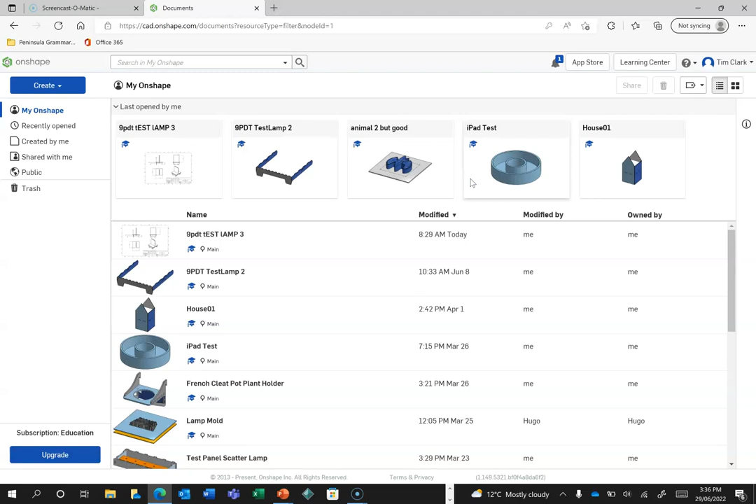The document title is going to be called, I'll call it Tute, because I'm using it for tutorial, Etch lamp, Etch LED lamp. That way it's named nicely so I understand exactly what it is. I'm going to press OK, and it's going to bring me straight into our working space or document.

So we're now working in our document. Before I do anything else, I'm going to try and remember where everything is, since it's been a while since I've used this. I'm going to create a variable down here, and it's going to be called material thickness. I'm going to set it by default to be 3mm, and I'm going to press tick.

The reason why I set my material thickness to be 3mm is that way I can define it, and if I want to use something that's 2.9mm or 2.8mm, I can change it to that size without having to redesign my entire lamp around that. You can only do a certain amount of changes before your design breaks, so this is only for limited changes, but we're going to set that up as material thickness.

Beyond that, I don't need to change anything else, and that is step 1 done. That will auto-save no matter what you do, so you can continue working. If your internet goes down, it'll save the last thing you did, and so on and so forth.

We're now up to step 2. We're going to start creating parts. The first part we're going to create is the main base. The main base is the jointed part which joins the entire thing together and holds the batteries and that sort of thing. So we're ready to go in OnShape, and we're going to create the main base.

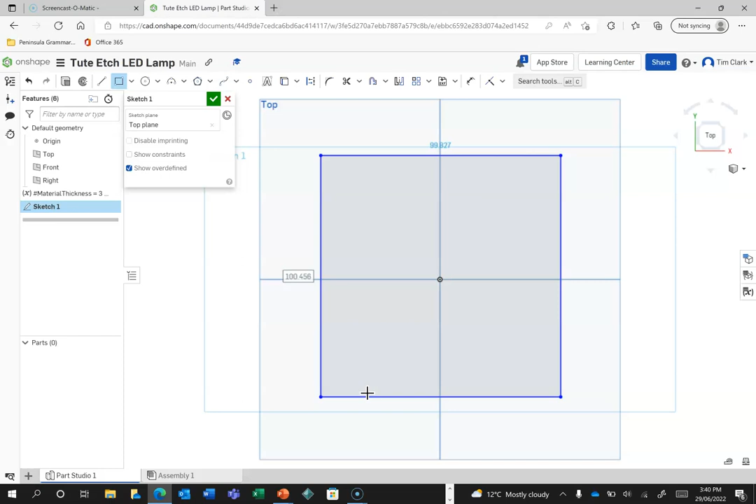It's important that we have our square perfectly on the middle, because that will mean we can do duplications or mirroring. Particularly, we can use the mirror feature a lot more effectively, which becomes really, really important to do.

So I'm going to set it up in the middle by doing this. I'm going to draw a line, so click on the line, and select the construction tool and click on that. I'm now moving my mouse around until it pops over, and you can see the little grey icon changed to a line with a dot in the middle. That's a midpoint connection, so I'm going to click on that. I'm not dragging, I'm letting go, moving my mouse freely, and finding the other midpoint over here so that little line with a dot appears again, and I click to accept that.

I'm now going to use the constraints tool, so I've still got this going. I can press escape, but I'm not going to. I'm just going to use the constraints tool, find the midpoint, and lock the midpoint, which is this middle thing here, to the middle of this line. So now that midpoint is locked.

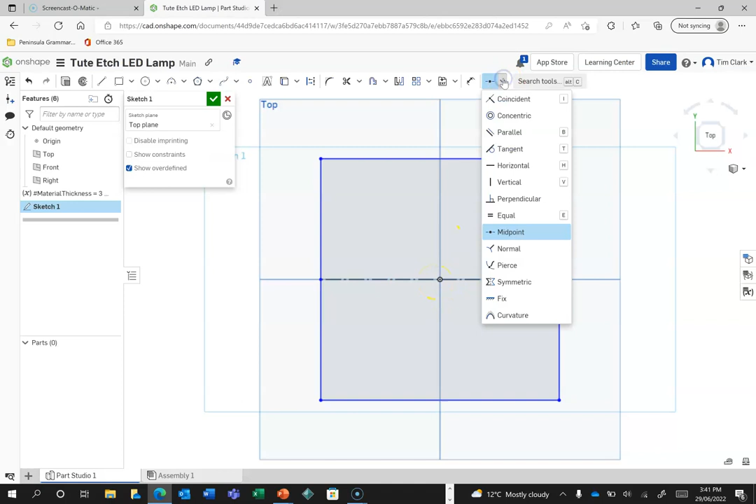I'm also going to make it a square, so I'm going to use the equals tool on this line here and this line here. If you make two sides of the rectangle the same, it becomes a square, because two adjacent sides become equal.

Now I'm going to finally set the dimension, so that's the dimension tool there. Click on there, move it up, click once, click here again. Notice I'm not clicking and dragging. 120 millimeters is the size of our base. I'm going to press enter, and my internet's being a bit slow, and there it goes. So we've got that square ready to go.

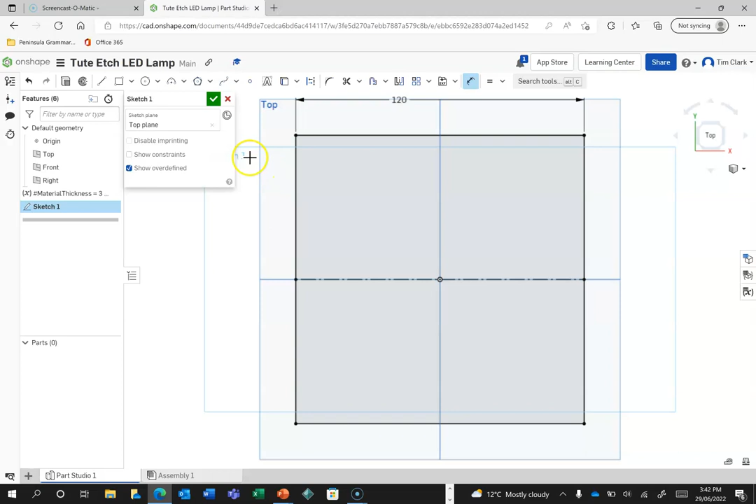That is perfect, that's what I want. I'm going to press the tick to accept that sketch.

I'm then going to press on this one here so that I can see, maybe that one there, so I get it around the right way, so I can see my square in a sort of 3D perspective.

The final thing I'm going to do to make this part is extrude it up, and the extrude depth is going to be equal to M, the material thickness. I'm going to click on material thickness, and press tick, and that is my main base. So I'm going to press tick to accept that extrude.

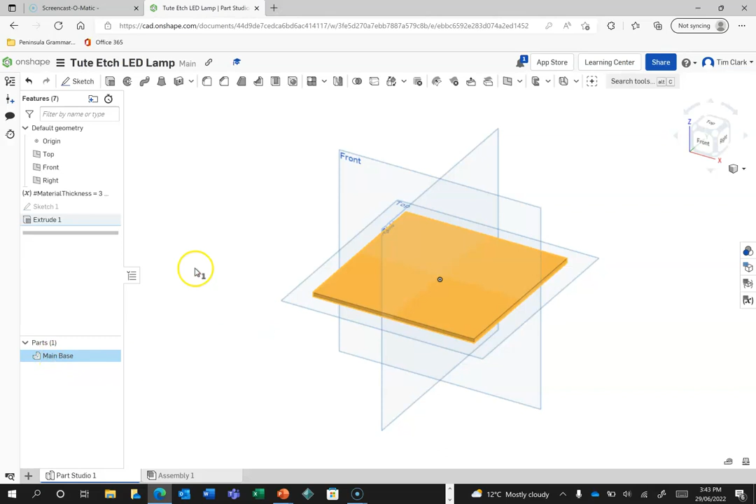Now that I've got this part down here, I'm going to right click on it and choose rename, which is right up the top, and I'm going to call it main base, and press enter to accept that change. So now that's called main base. That helps me to understand that, so I'm definitely going to label my parts here, and that is step 2 complete.

We're going to create now step 3, the legs. The legs will stick out of the main base and will be finger jointed at one stage, but we need to just create them in the first instance. Creating the legs is a fairly simple affair.

However, we're going to make sure that we are looking at it this way. If you've created yours on the front instead of the top, or on the right instead of the front, or on the top instead of the front, you need to go back and do step 1 over again.

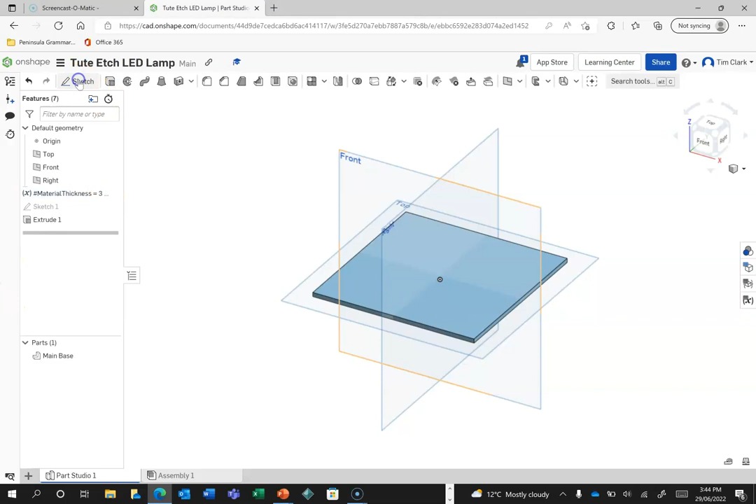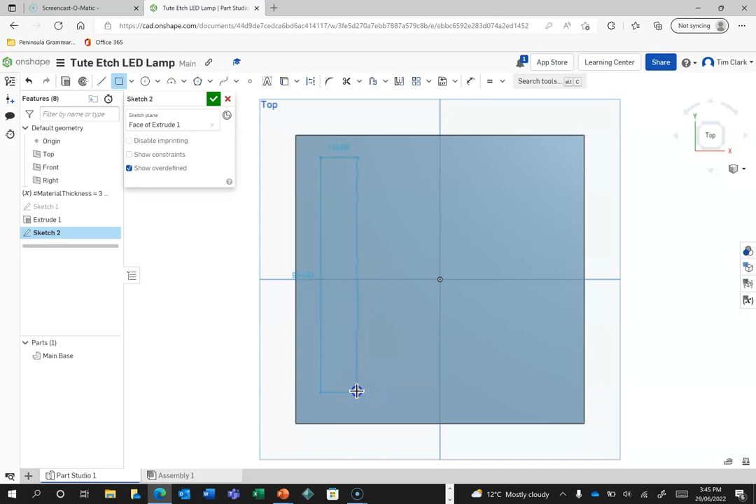So we're going to create the legs. The legs are fairly simple, they're going to be rectangles. I'm going to draw a sketch on this one. Instead of drawing it on any plane though, I'm going to make sure the outside of my square of my main base is selected, and click to accept that. I'm then going to look at that from the top, and draw in a rectangle. The rectangle is going to go from this top quadrant here, and it's just going to be roughly that size, like so. So you can see that I've drawn the rectangle.

We're now going to fix this rectangle with some dimensioning tools. I'm going to click on the dimensioning tool, and click on this line to select it. It should select it, maybe I've done that wrong, so I'm going to press escape. If I ever get in trouble, press escape and click on the dimension line, then click on the top line of the rectangle, and that's going to be the dimension. I might put it over here, and make that 10 millimeters.

I'm now going to set this dimension from here, from this bottom line. Click, let go, click, let go, click over here, let go, 10 millimeters.

And I'm going to set this one in here, click between here and here, click and click. This will also be 10 millimeters. Now, the width of my rectangle between this line and this line is going to be my material thickness. So once I've got the material thickness done, press enter.

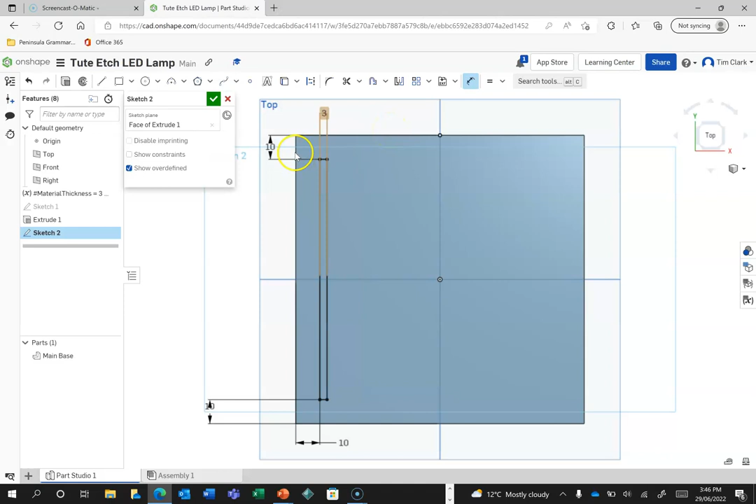There it is, it's now set to 3. If I go back and change the material thickness now, it will change the thickness of my main part and will change the size of that rectangle. I've now completed that sketch, it's now black.

I'm not going to draw my other leg in, I've got a different way of doing that. So I'm going to press tick in order to do that, and I'm going to look at that from the angle, and zoom in on that section there, because I'm going to do an extrude, and extrude that part there in a different direction.

So I'm going to change the direction, and it is going to be 40 plus material thickness. Does it accept that? No. Well, we'll make it 43, and that'll be fine because it doesn't really matter whether that works. I'm working on it in a different program.

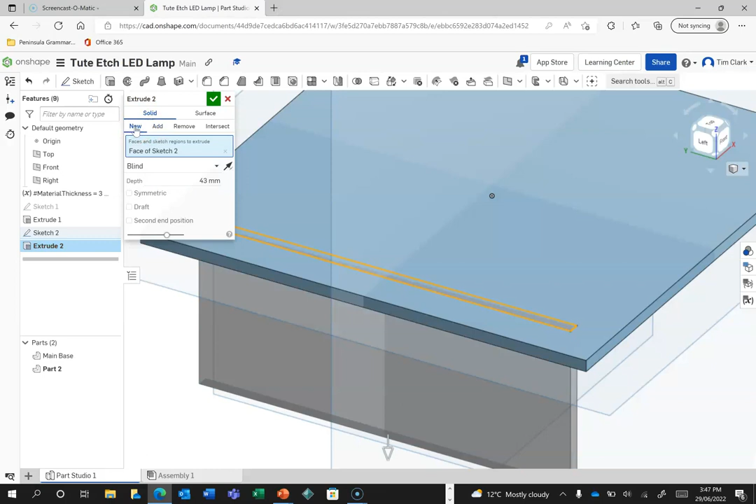Now you'll notice that it says add here. I don't want it to say add, I want it to say new, and press OK or tick. Now if yours is not a different color, and you can't see this line here, it means you added it. So we can go back into Extrude 2, which is where you created that, and change it from add to new. That is going to be my leg.

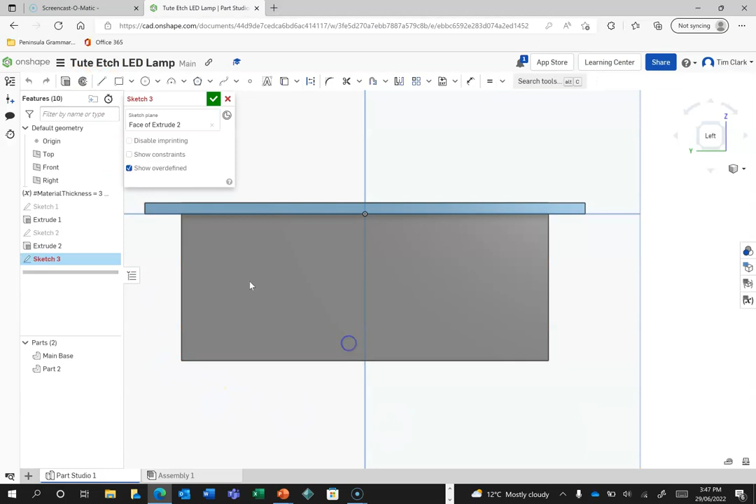You can see there that's a bit of a boring leg, so I might actually create a bit of a sketch on here, and put in a rectangle from here to here, and make that some dimensions. Click on here, let go, click on here, I might make that 10 up, and press escape, and drag that line in there so it's inside.

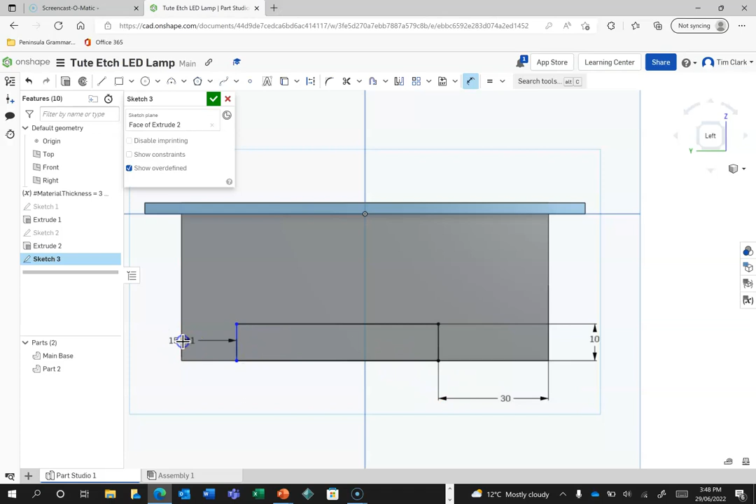Now I'm going to press on dimension again. Difference between here, click, and there, click, I'll make that 30 millimeters, and I'm going to make this one here to here 15 millimeters, and press tick, and go extrude on that rectangle there, and this time I'm going to choose remove, and we can see there that it's not removing it, it is removing it. So I'm going to press tick.

That's my basic leg. The final thing I'm going to do before I do anything else is I'm going to cut the fingers out of this one. Actually no, I'm not. Fingers are later. So we've got that part there.

The final thing I'm going to do is use the mirror tool. So I'm going to create a mirror, this little one here. It's a mirror, a grey part and a white part. I'm going to click on the mirror tool, and click on the part that I'm going to mirror. See, it says it's blue here. That's what I'm doing at the moment.

Entities to mirror - so I'm selecting the part I'm going to mirror. I'm going to select that one. Now I'm going to click on this one. So this is blue. The mirror plane is going to be the right plane. And it's going to put another one over there. You're noticing it's adding - if I do that, it's going to basically join them all together.

I need to click new. So if I didn't do that, then we're good. And we're going to press tick. So we now have two legs.

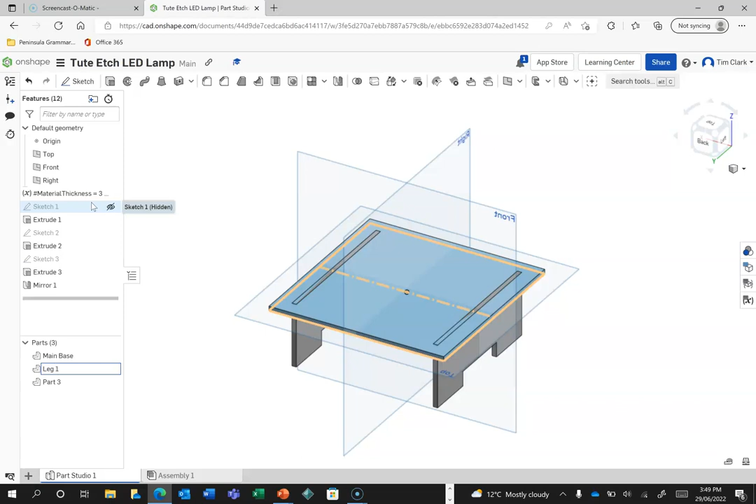I'm going to rename them. Rename leg, LEG 1. Press enter. And I'm going to rename this part here as LEG 2. Press enter. So we've now got our legs for our lamp, and we are now finished that part.

Now we're going to create the cross panels. The cross panels are going to strengthen the legs so they don't wobble from side to side or easily break, and that will also hold the LED panel. The cross panels are going to add strength between the two legs.

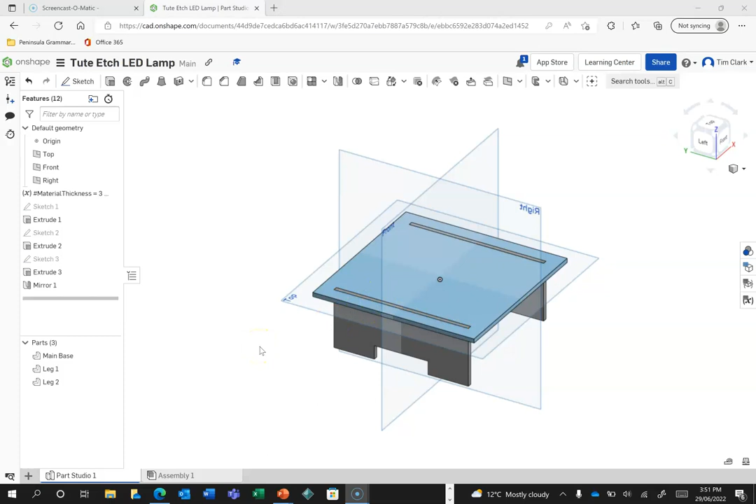If you actually just join this right now as it is, it would work because that part's interlocked with that part. But if you try to join them right now, they sort of wobble a bit. We don't want that, so we're going to add in a cross panel on each side in order to make that work. We're going to do this first of all.

Now we're going to hover over the main base and press on that little eye to make the main base disappear. We don't need to see the main base in order to do this.

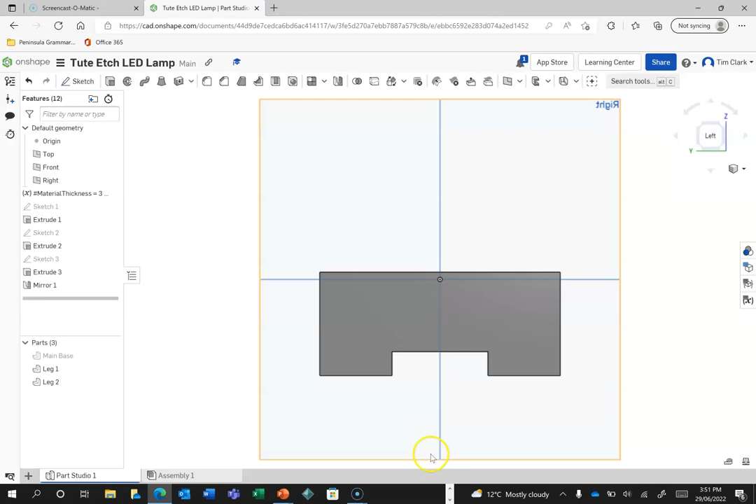I'm going to look at this from the left hand view, and basically put a cross panel over here. The strongest way to do this is I'm going to press sketch, click on that panel, and put the rectangle just inside this part of the shape.

Not on the edge of the shape. If you put it on the edge of the shape, it's strong, but it's not quite as strong as putting it inside the shape. So I'm going to make sure I'm hovering over that line for my first click. I'm letting go, not clicking and dragging, and I'm going to pull it down about that far, like so. And there we have the lines that we're going to draw for our cross panel.

We need to dimension them, so I'm going to use the dimension tool. I'll click on here and click on here, and use material thickness, 3 millimeters. I'm going to set the dimension from here to here. The thickness of the actual panel is also going to be material thickness of 3 millimeters.

The distance from there to there, I'm just going to click once, pull out, and drag down. I'm going to set that to be 23 millimeters. The reason why I'm going 23 millimeters is the top 3 millimeters from there to there is actually into the base. So we're going to press 23.

Now, obviously, if we need some adjusting, that's not going to change too much. It's still going to be roughly 20 mils down, but that's what we'll actually have it set up as.

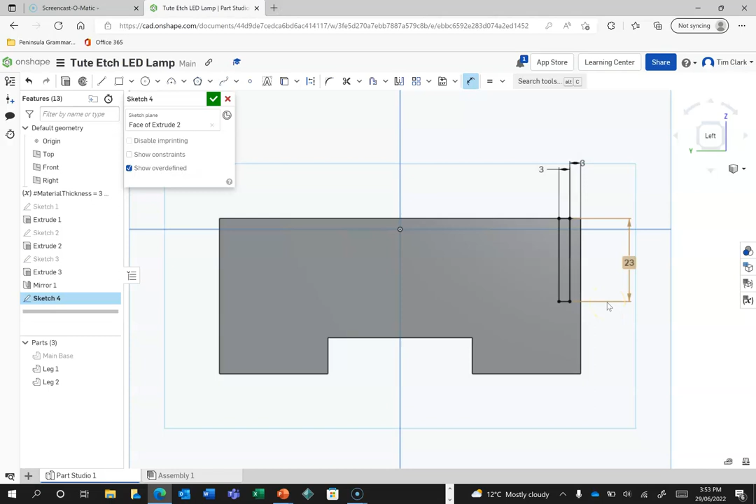So now I'm going to press on tick to accept that. I'm going to look at this from an angle so I can see that one there. That's the one I'm going to extrude now. So I'm going to extrude this, that one there. You can see it's wanting to come out at the moment.

I'm going to turn around and look at it from the other side now, like so. And instead of going blind, I'm going to say up to face, and click on this face. You can see it's going to go all the way through, and it's going to be a new part. That will be it. So I'm going to press on tick to accept that.

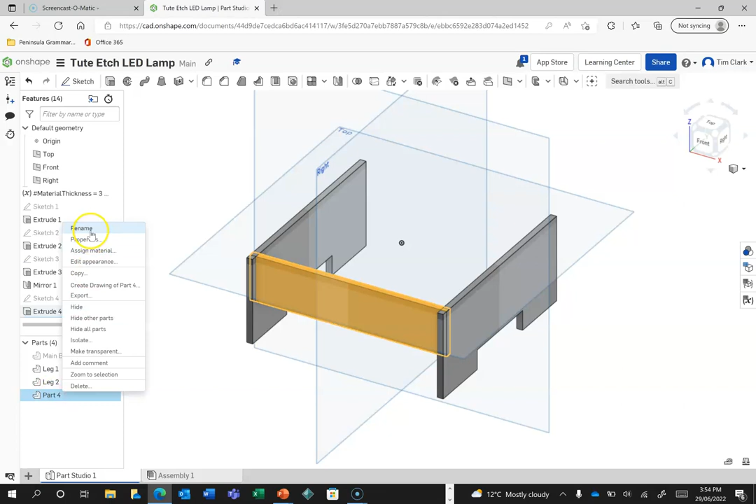And I now have a new part. You'll notice it's blue. If it's not blue, if it's the same color as your legs, that means you did it wrong and you need to go back into your extrude and change it from add to new. I'm going to right click on that now and rename it cross panel, X panel, like so.

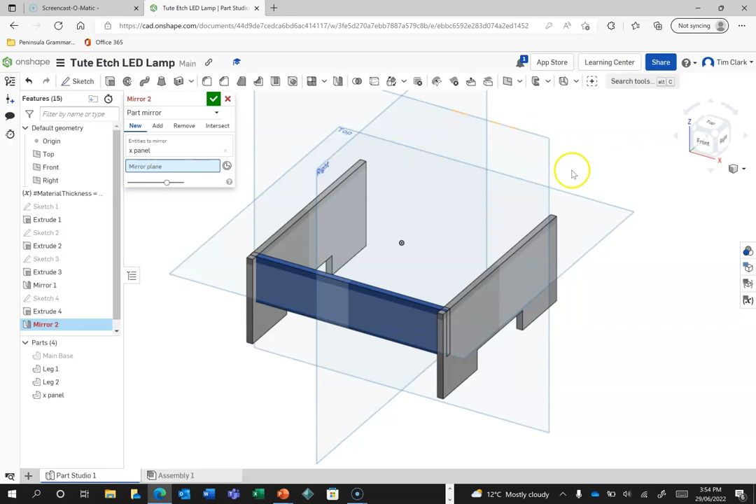Now I'm going to use the mirror tool to copy another one across. So where is that mirror tool? There it is there. Click on the shape that I want to click on. Click on this little thing here to say I'm going to select my mirror plane now. It's this one here, I'll just zoom out a bit so you can see it. It's the front one, and there it's going to go in there. It's going to be a new one, not an add or a remove. I'm going to press tick.

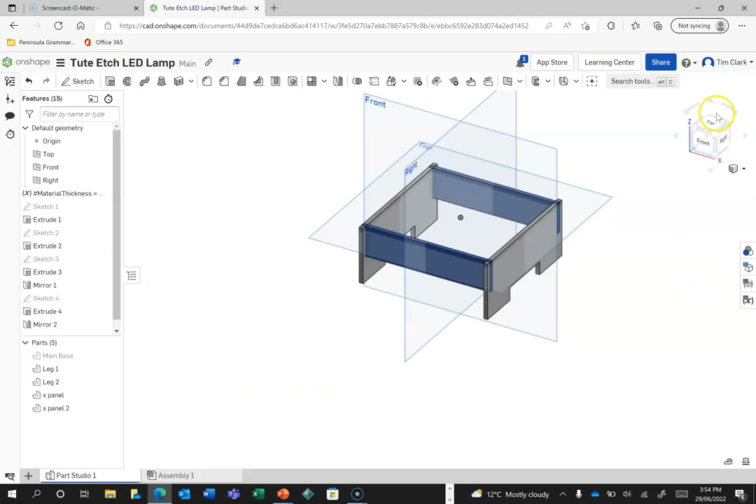And we now have our cross panel in there. I'm going to right click on that and rename that X panel 2, and press enter to accept that. So we now have that one and that one and that one.

I'm going to now turn the main base on, so we now have all of that sort of sitting there together. Obviously it's not going to work yet because we haven't done any joining, but that is the basic structure of what we're doing so far.

The LED panel will hold 3 LEDs that will sit and shine up through the etched perspex. So it's going to be a horizontal beam that goes between 2 of the cross beams.

So we're now going to create our LED panel, and we're going to look at it from the front here. That might not necessarily be our front. In fact, it's not going to be our front, it's really going to be our side. We're going to draw a little rectangle, and it's going to go all the way across to the other cross panel on the other side.

It's going to have 3 holes in it at various places, and that way we can set up our LEDs to sit in there, but we're going to do a few tricky things in order to get this right.

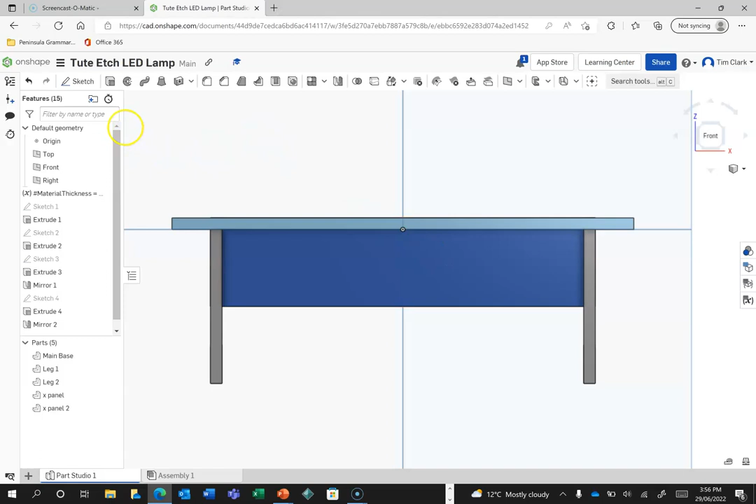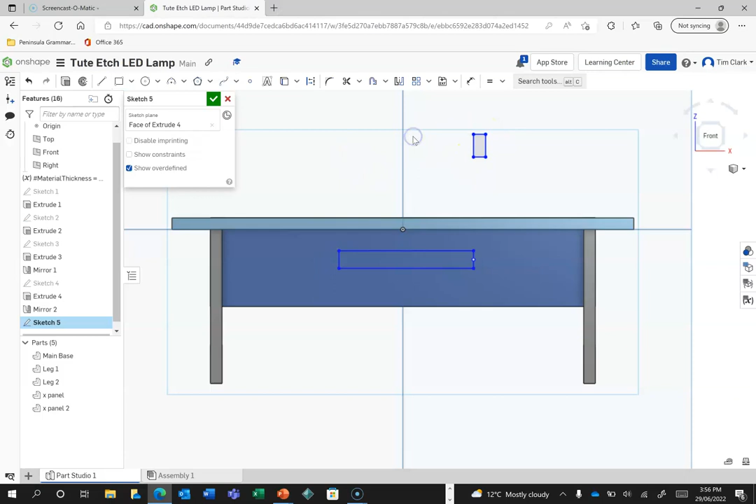So we're going to go sketch now, and we're going to create this sketch on the cross panel, on the outside of the cross panel, and it's just going to be a rectangle clicking from this side over to this side, like so. I'm going to set it to make it perfectly in the middle before I do anything else. That was bad, I'm going to press undo there. I am actually using the trackpad by the mouse, it's better if you use a mouse.

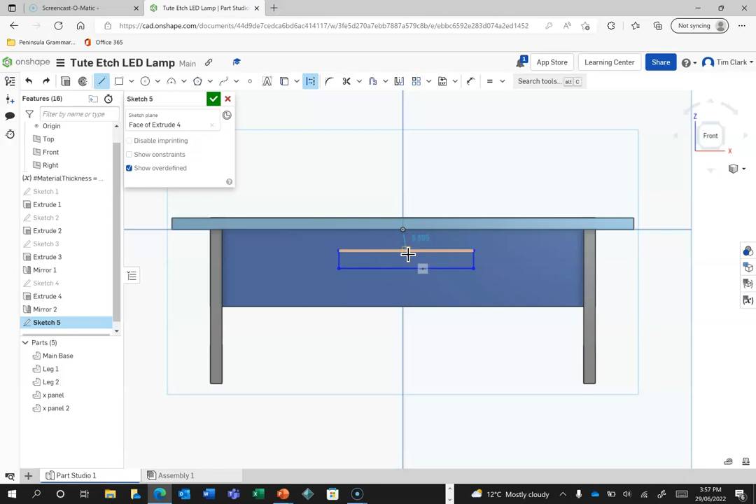Basically I'm going to use a line tool and a construction tool, and I'm going to go from here and find the midpoint of that line. There it is, you can see it's a little circle with a dot on it. Now that line is not straight up and down, so I'm going to make sure it is by using the vertical tool and clicking on it. So no matter what now, this rectangle is perfectly in the middle of this bigger rectangle.

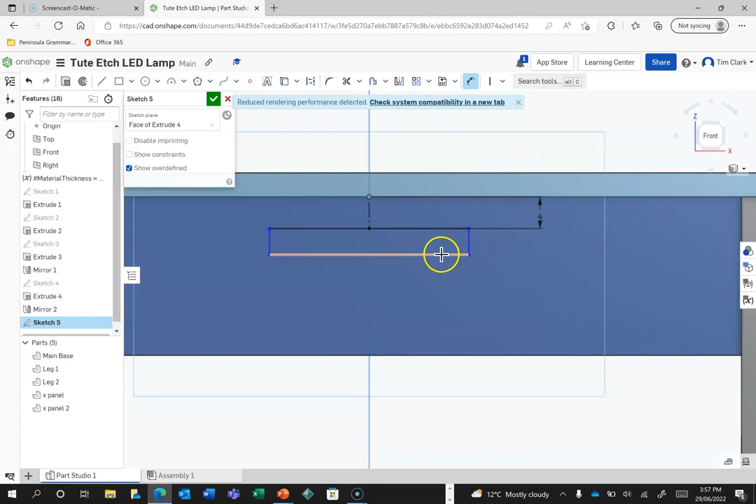I'm now going to set the dimensions of this. So I'm going to set the dimension from this bottom of this panel to here, like so, and set that to be 4 millimeters. I'm also going to set the distance from here to here, and oops, press escape if you ever get it wrong. I accidentally clicked on something else. Go back to there, click on here and click on here so I don't click on that again. I'm going to make that 20 mils wide, like so.

I'm now going to set the thickness of it, one here to this one here, click, click, and it's going to be the material thickness. So press M and then select material thickness and press enter. So we've now got that sketch drawn.

I'm now going to take that sketch, so I might view it from the front, can't quite see it from the front, so I'm going to view it from the right, and I'm going to go extrude, and click on that, and if you look at it now from the front you'll see it's sticking out. I'm going to look at it from this side, looking at it from the back, and I'm going to go from blind to up to face. I'm going to click on this one, and we're going to make sure it's a new thing that we're adding there, and we're going to press OK.

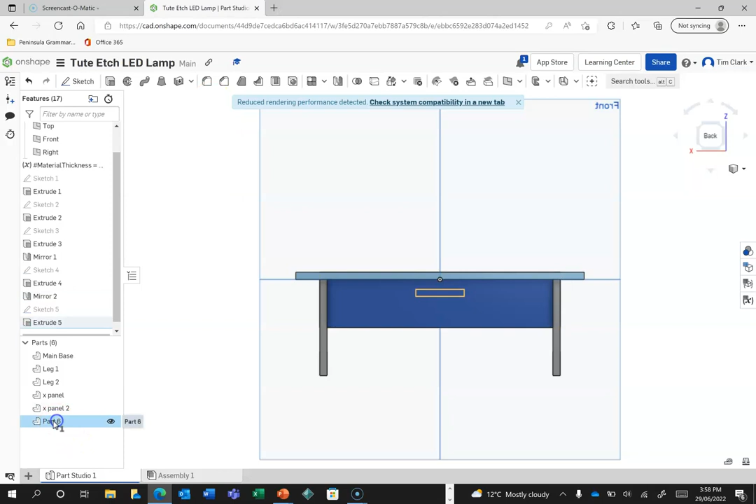And this is rename the LED panel, and press enter. So you can look up underneath and you should see a panel sitting up in there that is going to hold our LEDs, all three of them.

We're not going to put the holes through yet because we want to put the holes where they're going to line up with our particular panel. So that's our etch panel. We'll worry about that in a little bit.

We're now up to step 6, which is a rather complicated one, so you're going to need to pay careful attention here as we start creating all of the finger joints. This is a multi-step process, so we need to pay close attention, pause, always go back or undo if you're unsure of what you're doing, but really pay close attention, particularly to dimensions, and remember to not click and drag unless I tell you to.

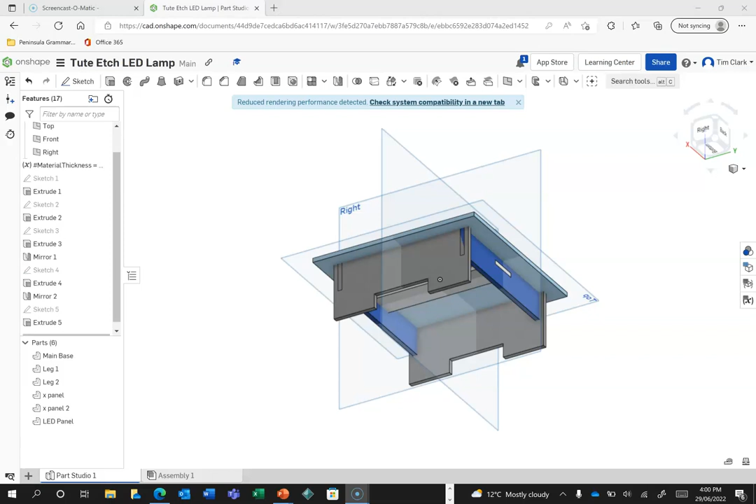Okay, this is where things get a little bit complicated. You should still be able to follow this, it's not going to be too tricky, I don't think. So we're going to go and do our finger joints. We need to cut fingers out of the legs and out of the side panels, or the cross panels, and out of the LED panel where they intersect with other parts.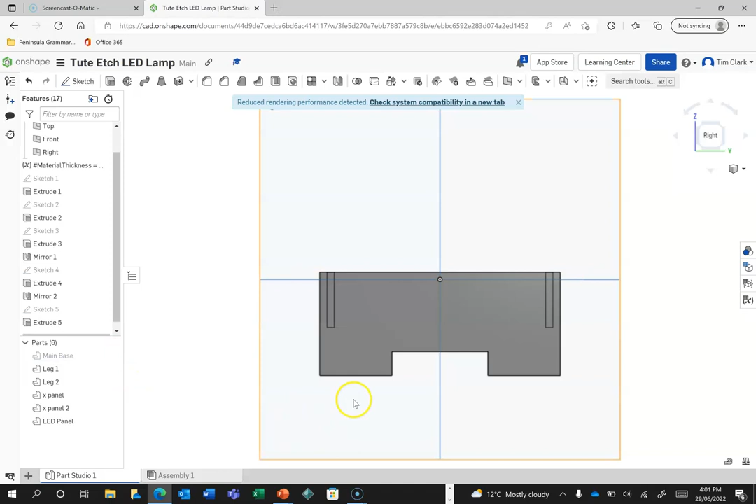That's fairly straightforward. I'm going to turn the main base off for the time being, and I'm also going to turn off my cross panel 1 and cross panel 2. And while I'm there, I might as well turn the LED panel off as well. So I'm just playing with my legs at the moment, I'm just going to put the parts into the legs. So I'm going to give you a fairly simple 3-finger joint, that should be fine.

I'm going to create a sketch now on the outside of this leg, like so. I'm going to draw in, as I said, it's going to be 3 sort of parts. So basically I'm going to draw from the top corner, one there.

I'm going to make it this big. I'll draw from the other top corner, from here to here, making it that big. Then I'll draw one from somewhere on this side to somewhere on this side, but make it closer to the middle on this side than the other. This just makes things a bit easier.

So I've now got my three sort of rectangles. This middle one's going to be quite easy, so I'm going to set the dimensions on this, from here to here, and make them all 20. The easiest way to make them all 20 is to make them equal, so this is equal to this, and this is equal to this.

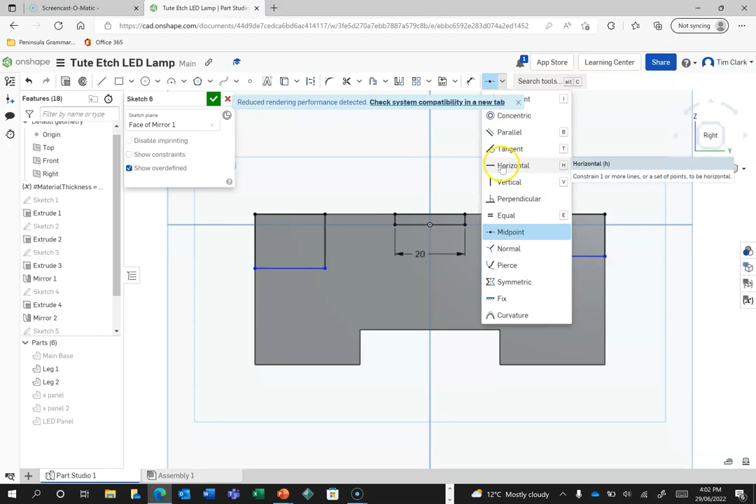Now they're all 20. I'm going to set this one here as a midpoint, to that point there - nice and easy. Then I'm going to set this point here on that corner horizontal to this point here on this corner, and this point here on this corner to this point here on this corner, horizontal.

So I'm going to have 2 fingers sticking up through, and that should be fine because I've got lots of fingers all the way around the box anyway. If you want more fingers, make these 10 and then do another 2 in here, spacing them out nice and evenly.

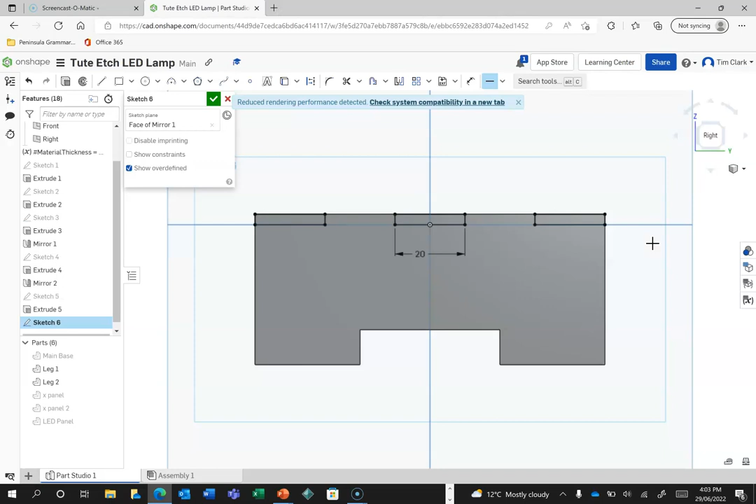If you space them out nice and evenly, they'll work either way. If you don't space them out evenly, it'll be a one-way lamp - every part will only go in one spot, and it won't be able to swap with the other part.

We're now going to do the extrude, so I'm going to look at this from the side. I'll press the tick to accept that sketch, and now extrude this one and that one - so all 3 of them.

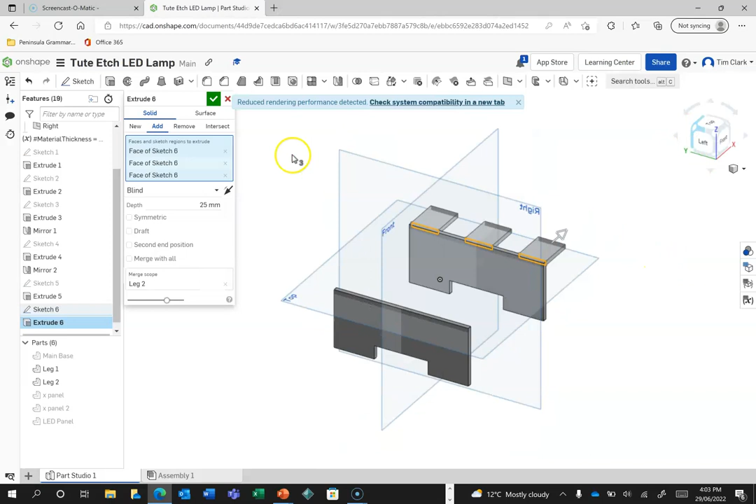I'm going to pull it round, and the type is going to be up to face, bringing it to this face here. The type is going to be remove, and the merge scope - there's nothing in there at the moment - is going to be this one and this one. So make sure that leg 1 and leg 2 are in there.

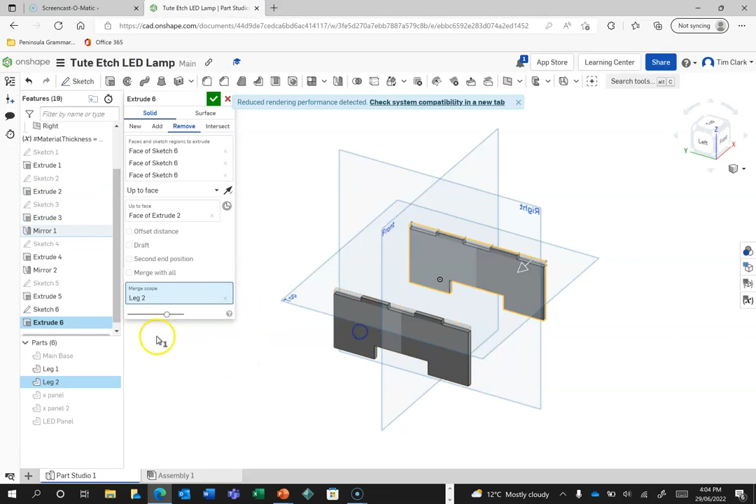If you accidentally click on it again, it goes away, so make sure that leg 1 and leg 2 are in there. Now press tick, and you now see that those fingers are done and they're in there.

We're now going to turn the legs off and do the cross panels. Turn those on, and that one on. Let's actually look at this from the right hand view - we've got to do little cross panels on this side, so let's do those first.

We're going to create a sketch and click on this part here, and draw in from the top corner a little box, and bottom corner a little box. While we're over here we'll do that one as well, making sure that you don't line it up with that, because that would lock it - though that's more likely to happen with that one.

So we're now just going to set this one up here using the dimension tool. From this one here to this one here is going to be material thickness, and this one here to this one here is also going to be material thickness.

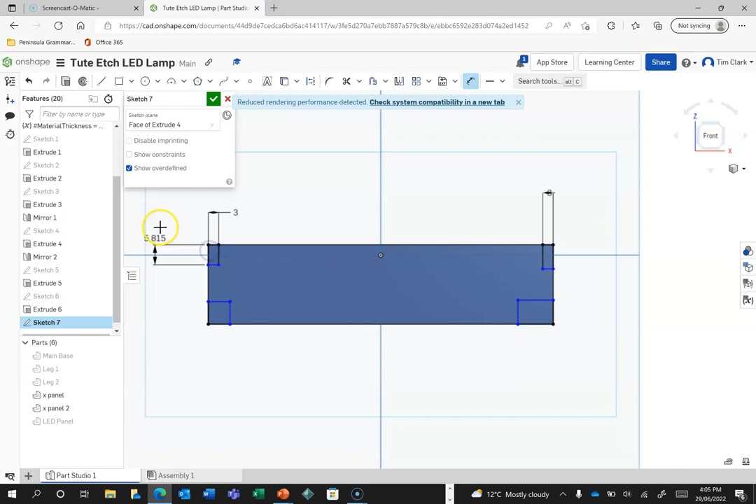We don't need to set those ones because we can make them equal somehow, so we're going to click on this one here - I'll make that, press escape, always do that. Click on here, press this one here, not actually on that line, and make that 5 exactly, press enter. And this one here, and this one here, also make that 5 exactly.

Now we're going to use the alignment tools, so we'll use the horizontal tool. This one here aligns with this one here, and this one here aligns with this one here. Then we'll use the vertical tools to align this one here to this one here, and this one here to this one here, like so.

Now, because we're going to have some extra fingers on the top, let's just draw those in now. We're going to draw 3 - I'll draw one from here, like so, and one from here, like so. I'm actually locking them to that size there, using that as a lock, so they're all locked.

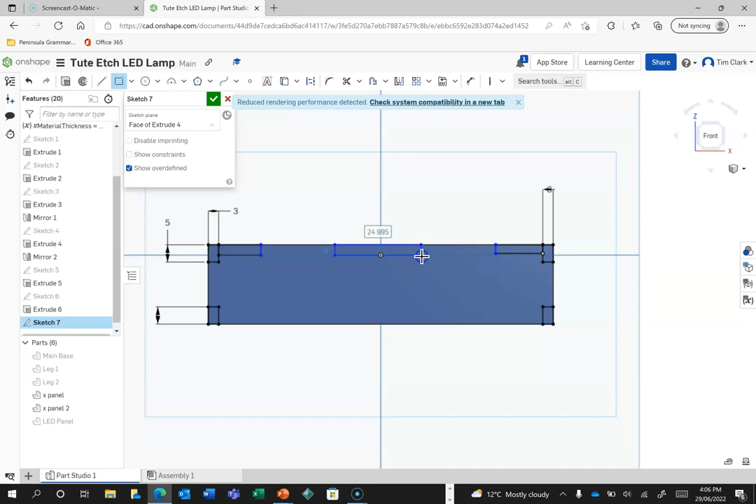If you didn't lock yours, you're going to have to set them to 3. And then I'm going to set dimensions. The dimension of this one here, I'm going to make 15 because they're going to be slightly smaller. Just enter. I'll make them all equal, so I don't like typing in stuff.

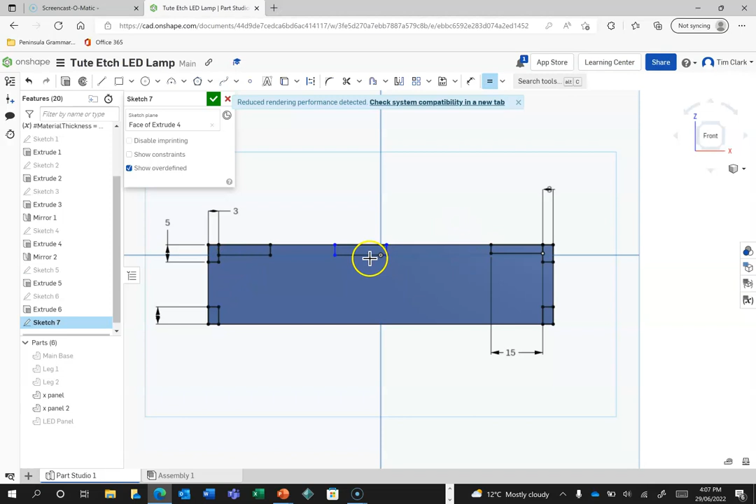It's much quicker to do - tick, tick, tick. Now to line this up with the middle, I'm going to use the midpoint of this one here and that point there, and that's going to line it up nicely with the middle. And I'm going to press tick.

So I'm going to now do the extrusion. I'm going to click on extrude, and select all of those rectangles that I just did. This is annoying how it comes down in front of it, all those many rectangles. Let's look at it from this side.

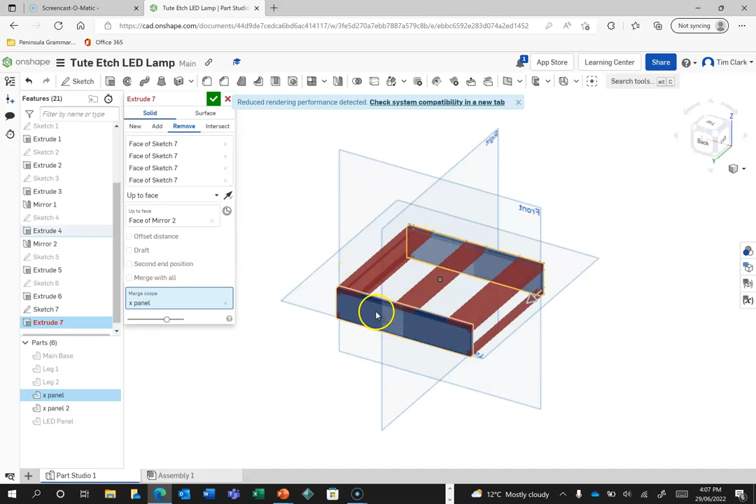You can see there, selected all of them, and now I'm going to basically bring it to, instead of blind, up to face. I'm going to click on this one here. I'm going to click on remove, and make sure that the merge scope contains that one and that one - x panel, yep, x panel, and x panel 2, and press tick. So I now have those panels done.

This is getting long, and we're going to keep going though. So the final one I'm going to do is the LED panel. I'm going to turn the LED panel on, and do a sketch on top of the LED panel. Let's view it from the top.

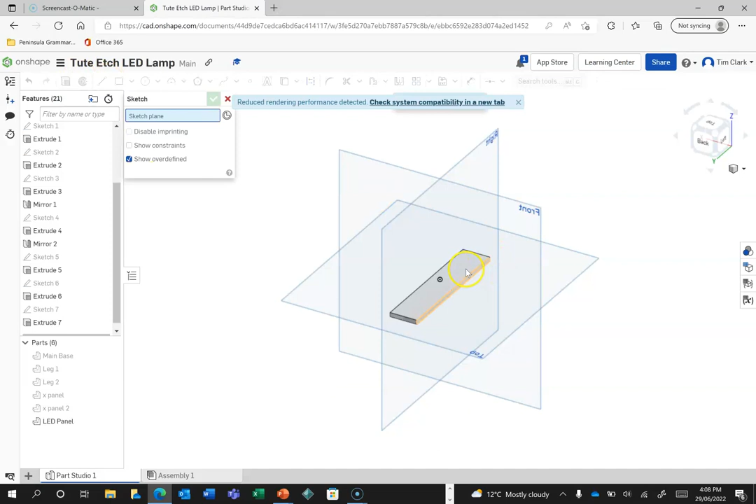This is only a small one, so we're going to do the rectangle from here to here, from here to here, from here to here, and from here to here. So now we have those rectangles drawn.

We're just going to do some dimensioning. This distance from the top to here is going to be 3 millimeters, and because I'm going to be lazy, I'm going to make them all equal - this one here to this one here, this one here to this one here, this one here to this one here. So I'm just going to make them all equal to 3 millimeters. Makes it easy, doesn't it? So eventually they should all turn black, and they should all be equal to 3 millimeters.

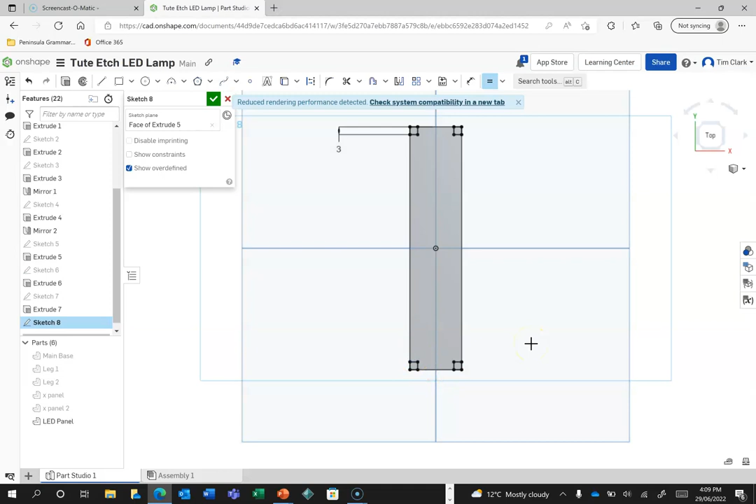And I'm going to press tick, and now I'm going to extrude them. This is easy - I don't actually have to do any merge scope stuff. I just have to select them all and press remove, and then press OK, tick, like so. And now it's all removed.

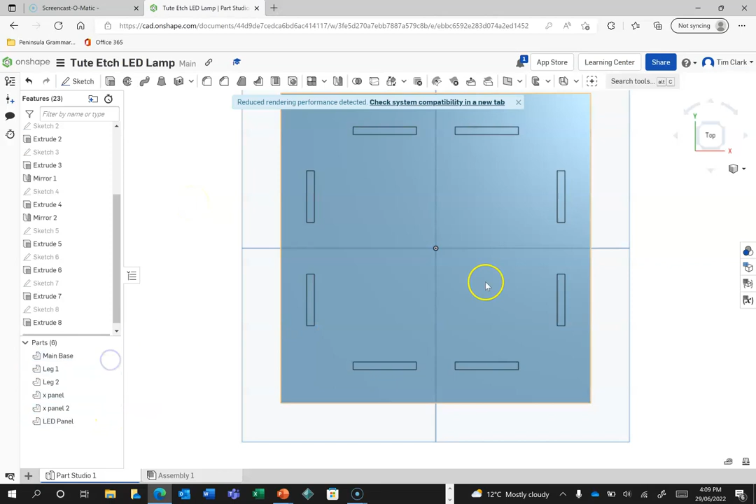So now if I turn all my parts back on, you think I might be finished? Well, not quite. You can see there the fingers are sort of through, but you can see how it sort of changes colour a bit - it's got a bit of a splash of colour in there. That means that those parts are still intersecting with each other, and we don't want them intersecting each other. We want holes in that top.

So we're going to use this special thing here called - get rid of that - I'm going to press here called the Boolean. The Boolean will basically allow us to do what we call a subtraction. Now the tools that we're going to use first for the first subtraction, there are going to be a couple of subtractions we're going to do. The tools we're going to use for the first subtraction are going to be the legs.

You can actually click on that part there, and you should be able to select that one, this leg here, and this cross beam here. And the target is just going to be the top. So you should have 1, 2, 3, 4 panels in there and the main base in there. You're going to make sure that Keep Tools is checked, and we're going to press OK.

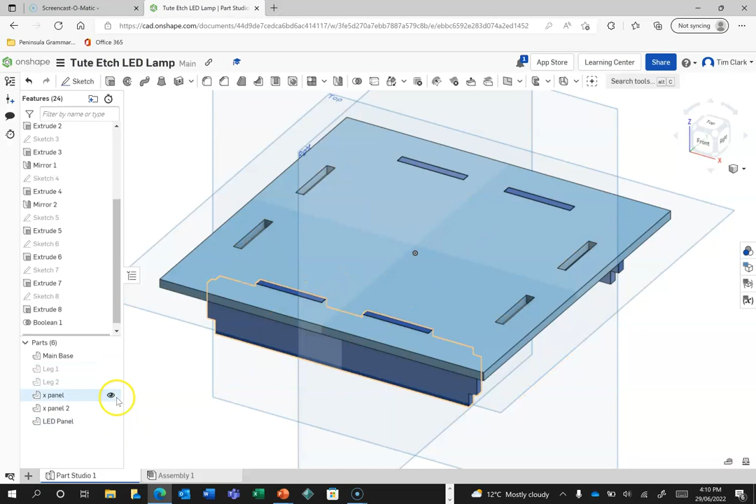Now that doesn't seem like it's done anything, but you'll notice it's now not blurry or changing colour in there. And also, when you start turning those legs off, you'll see that there are holes cut in the main panel. So that's good, that's exactly what we want. So let's turn those panels back on.

We now need to also cut both of the panels through the legs. So you can see there that that's not quite right. Also notice that that's not quite right. So we have to do another two booleans to fix this.

So I'm going to do a boolean here. It's going to be a subtraction. The tools in this case are going to be the cross beams, and the targets in this case are going to be the legs. And we're keeping the tools, we're doing a subtract, and we're going OK.

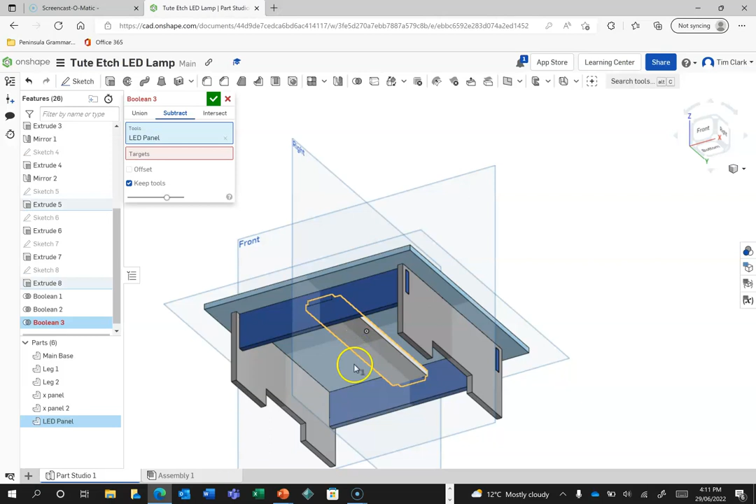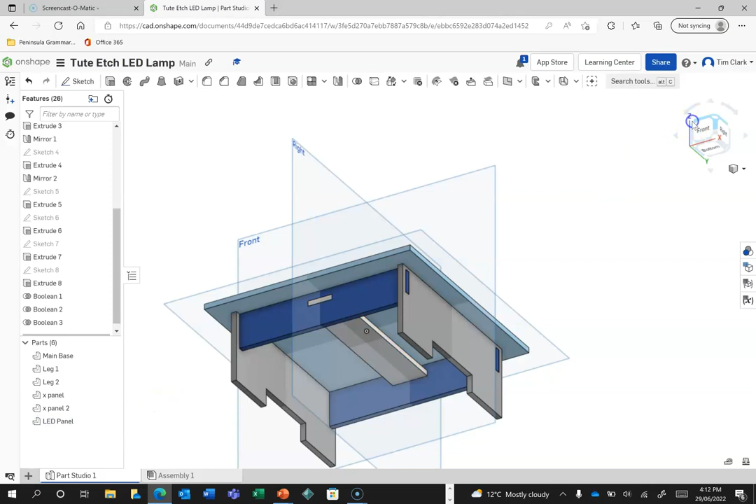So if we turn those panels off, we can see that the legs have holes in them. We turn the LED panel off, we can see that the cross panels have holes in them. So each part is now going to interlock nicely. If we cut those out on a laser cutter, they will perfectly fit together. And we now have our base. I'm sorry that took so long, but that's the way this actually has to be.

We're now going to create the finishing panel. The finishing panel is the top surface of the base of the lamp. So the lamp has 2 legs, 2 cross panels, a main panel which joins into it, but the finishing panel will hide all of the joints and make your lamp look a lot nicer.

Okay, the finishing panel is a fairly easy affair. All you need to do really is to create another panel on top of this one that's the same size, but it's solid. We don't want to see those joins in there because they can be a little bit distracting. So you'll be able to see them no matter what if you leave it on, but if you put a finishing panel over the top, we won't see them at all.

So we basically just could sit there and go extrude and click on that one, and you'll see that it all pops up, and that's a bit annoying. So I'm going to click on that, and I'm going to select each one of these first, each one, making sure I get each one nicely, and then I'm going to select the main one. I'm going to set the material thickness like so, making sure it's a new piece, and I'm going to press on tick to accept that.

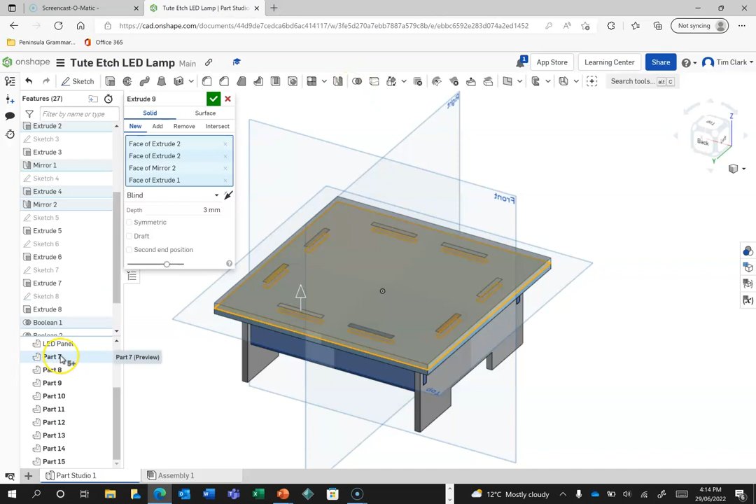And you'll see that that's a little bit annoying, this method, because it's created a whole bunch of parts. That's fine, we can actually fix that by going like so. So the LED panel, all these parts here, we're going to click on Boolean, we're going to do Union, and we're going to select Tools, we're going to click on Shift and click on that one, all of those in the panel, and that's going to be part 7. I'm just going to press on tick, and now that's joined. So that's the easy, cheaters way of doing it. I sort of don't really like that very much, but that's how we do it.

Now I'm going to rename this. We'll call this the finishing panel, and press enter. So we've now got our finishing panel.

We're now going to create the etching panel. The etching panel joins into and goes through the finishing panel and the main base panel, and that is what the light shines up through. We won't be doing any of the etching design in OnShape, just the outside shape for this one. So it's a fairly straightforward thing that we've got to create. Let's get into that now.

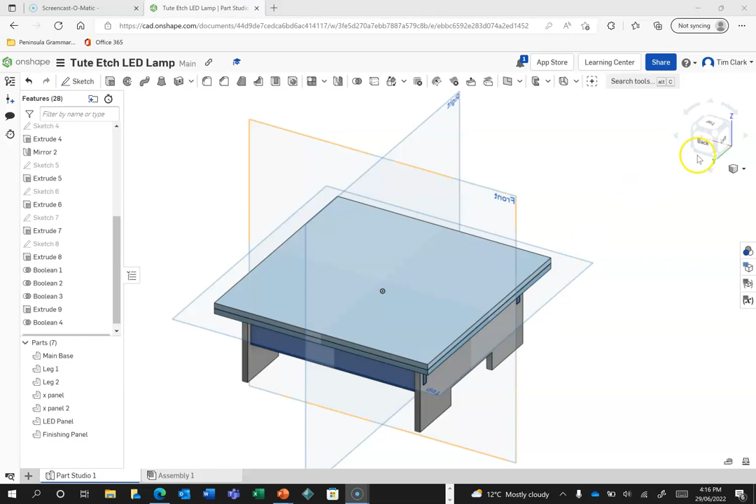Okay, the etching panel is going to extrude up from the middle, the dead set middle of this particular panel, but it's going to be inside of the legs so that we don't have any sort of overlap with the legs. That's sort of important that we do that. So there's a number of tricky ways I could do this. I'm going to do it the untricky way. It's going to be the simple way rather than the tricky way.

You can see that this panel here is the direction it's going to go, so it's actually going to be these legs here are going to be the face of it. So I'm going to click on here, and I'm going to have to draw my panel inside this section here, but all the way through. So let's just do that now.

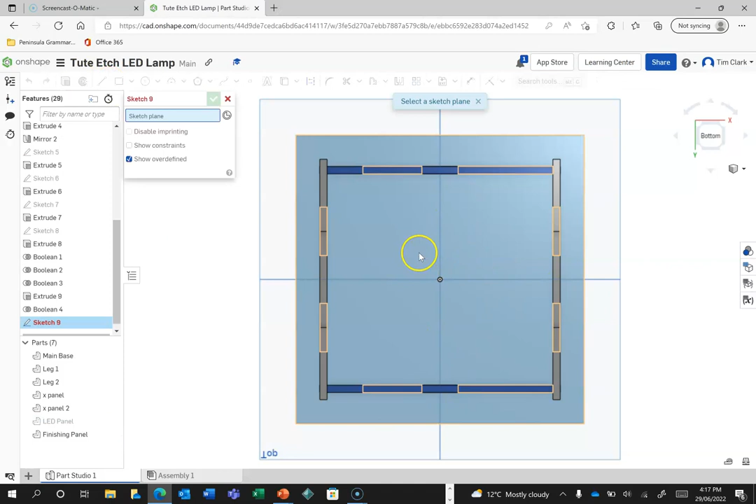So here we go. I'm going to turn the LED panel off, and I'm going to draw a sketch. The sketch is going to be underneath, so it's going to be on the base or underneath the main base. Now remember, it's going to be parallel to the legs. So I'm going to draw in a corner rectangle. I'm going to start up here, and I'm going to go somewhere down here. So the first things first is that it is going to have a dimension. Oh, actually I won't do the dimension first. I'm going to make it middle or center first.

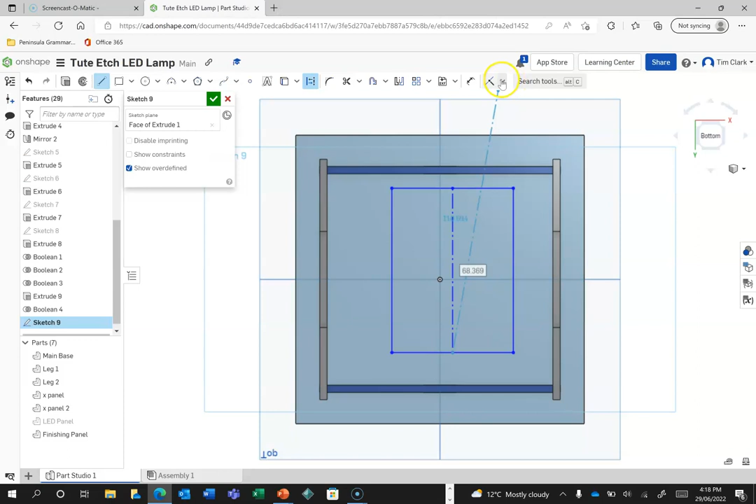Easy way to do this with a big one like this is to go from a line from the midpoint here, I'll make sure it's a construction tool, to the midpoint down here. That's going to be the middle of those two lines, and if we line this up to the middle of that, let's find the midpoint tool up here. We click on this and then click on this. That's going to lock it. Did I get that? Yeah, okay, so there it is.

It's locking on. I'm now going to set dimensions of this. Actually, it doesn't really matter if it overlaps this. So what I'm going to do is use the coincident tool to set this equal to that, and that basically means that's joined up from there to there. Then I'm going to use the dimension tool from here to here to make this my material thickness.

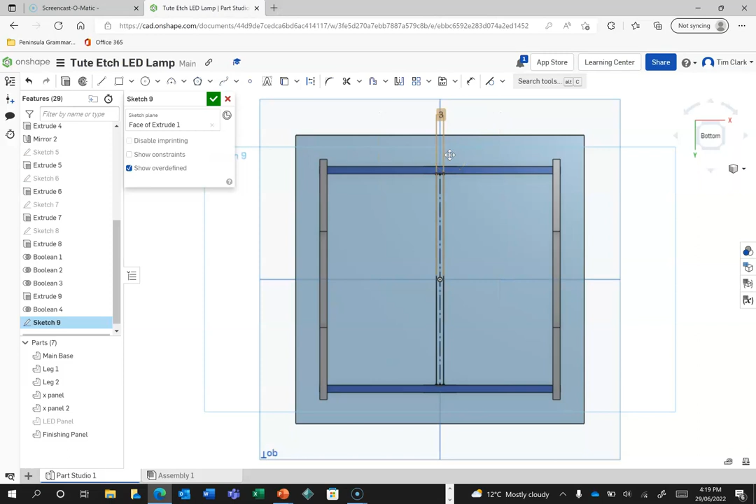Press escape, double click into that. M for material thickness, and there we go. So I'm going to turn off X panel, X panel 2, and leg 2, just to make this a little bit easier to see. I've now got, I'm looking at it from the bottom and it's hard to see, but there it is. I'm going to press the tick to accept that sketch.

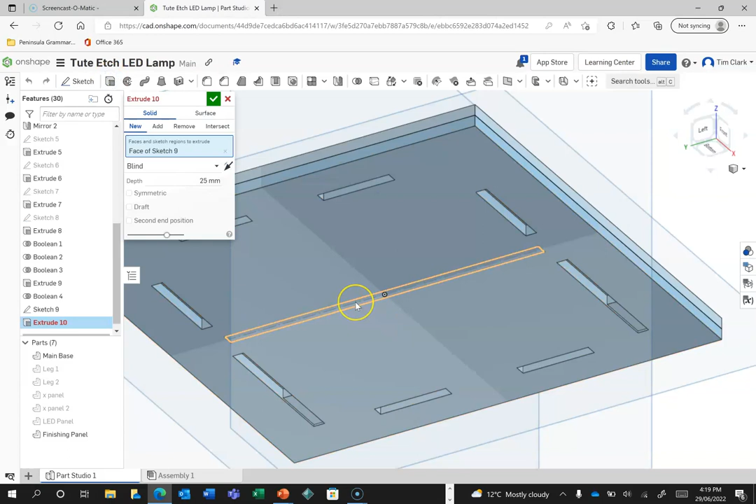I'm now going to extrude it. At the moment it's going to want to extrude it down. I'm going to change the direction and go up 136 millimeters. It's going to go new, and I'm going to press tick.

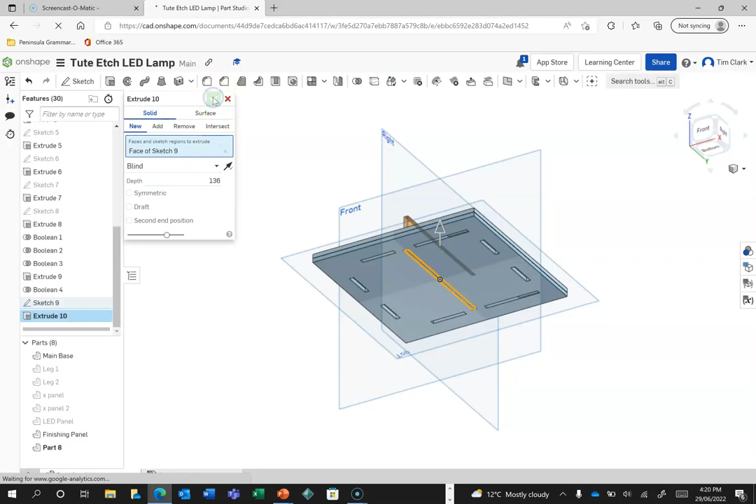My internet is popping in and out, and this app relies on internet, so it's taking a little bit of time. Okay, my internet sort of stopped, so I'm going to go new again, press on tick, 130 millimeters - 136 didn't I say - and press tick. Yeah, you need the internet to actually use this thing, and if the internet's not working, then that can happen.

So now I'm looking at that sketch there, and that looks about right. That looks like it's going to be a good size for my lamp, and so that will be the etch panel. Let's actually rename that as etch panel.

But we're not finished yet. We're going to put some fingers in here so that the light can shine through. We need to put 3 fingers, so we need to see 3 fingers on this. I'm going to turn the main base off, and I'm going to turn the finishing panel off.

So at the bottom, we're going to draw in rectangles this time because we want 3 lights. If that doesn't make sense to you, it will eventually, because we're going to put a sketch down here. We want 3 fingers of actual panel to go down in. So I'm going to basically draw in a rectangle here, like so. I'll make it ridiculously big.

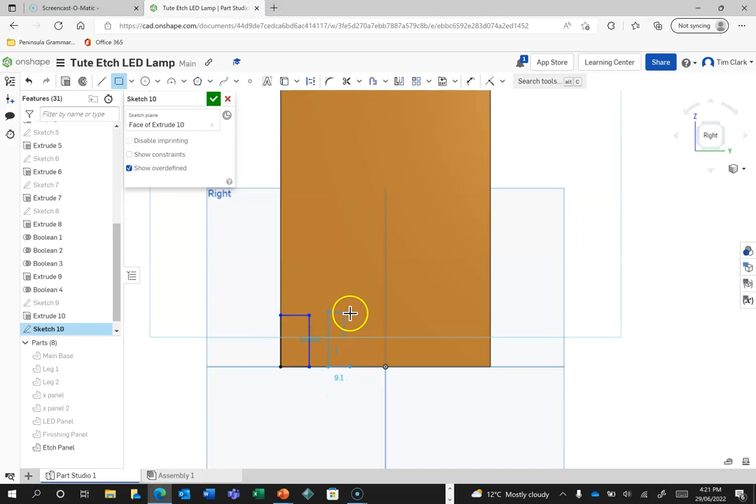I'm going to draw another one from this line up. From this line, I'm not going to lock it to anything over here. And from this line here - there's 3, there's 4, and there's 5. Okay, so now I'm going to do this.

This might seem strange, but this is what I'm going to do. I'm going to click on here, and the difference between here and here, I'm going to press enter - I'm not going to change it yet. The difference between here and here, I'm going to press enter, not going to change it yet. The difference between here and here, same thing. The difference between here and here, I'm going to press enter, not going to change it yet.

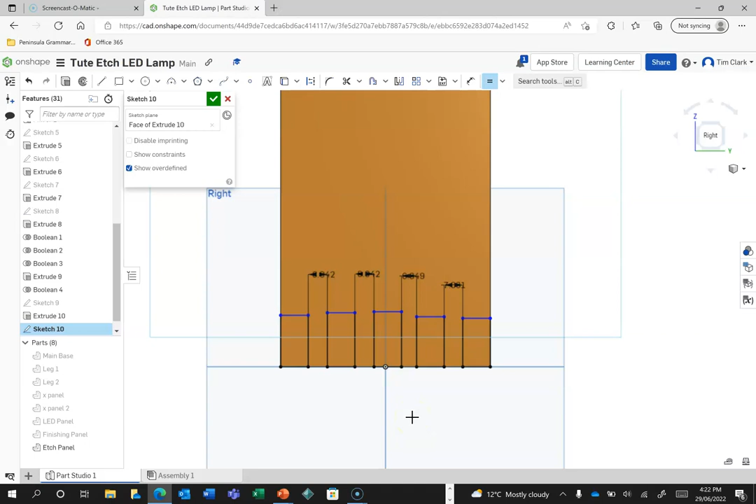I'm now going to set all these to be equal. This one here and this one here is going to be equal. This one here and this one here is going to be equal. This one here and this one here is going to be equal. And this one here and this one here is going to be equal. Now that they're all equal, I'm going to press escape.

And I'm going to double click into these and change them, and make them all to be - I'll make them 10. Oh, my bad, take 2. Hopefully I just made a mistake, so I have to go back and edit this. Hopefully I edited it properly.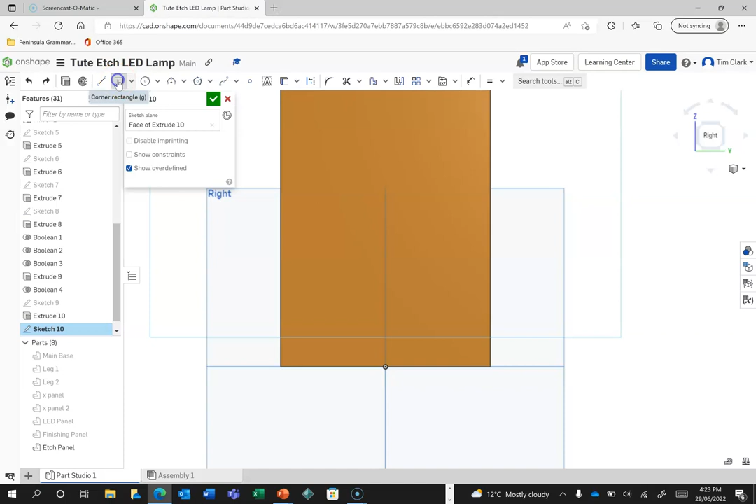So here we go. So I'm going to basically draw these rectangles. I need to draw 4 of them. If I draw 1 here, I'll draw them up nice and big so I can see them - 2, 3, 4. I might have gone on about drawing 5 rectangles.

I might have made a mistake there, and now I'm fixing it. Hopefully I edit this properly so that was all gone, but if not, there it is. So now I've got 3 columns left, so there's going to be 4 taken out. Those 3 columns are going to be important.

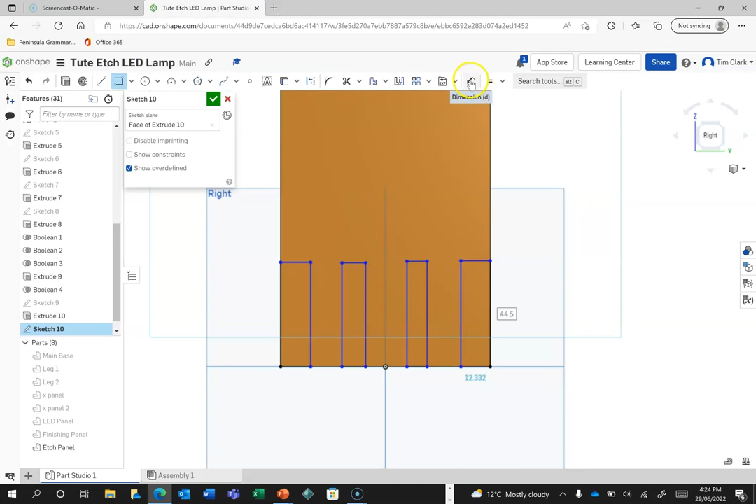I'm going to click here and use the dimension tool now, same as I was doing before. Click on here, dimension between each rectangle, press enter, and I'm not going to change it. Dimension between each rectangle again, press enter, not going to change it. Dimension between each rectangle once more, and I'm not going to change it.

I'm now going to use the equals sign, so the equals are there. I'm going to make this line equal to this line, this line equal to this line, and this line equal to this line, and they're all resized nicely. So I'm now going to press escape to get rid of that equals thing.

I'm going to double click on here and make each of these 15 millimeters. 15 millimeters is a good size to shine a 5mm LED through.

So now that they are all the right size, I'm now going to line them all up horizontal. This one here to this one here, this one here to this one here, this one here to this one here. They're all lined up.

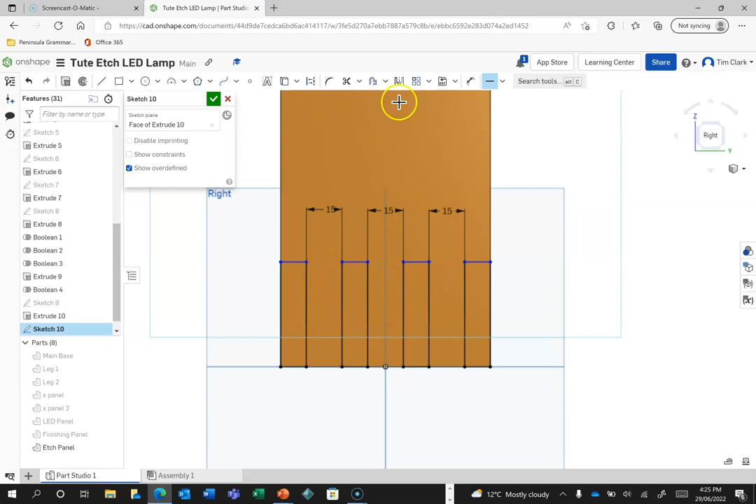I'm now going to set the dimension height from here to here, like so, and that's just going to be 6mm. Doesn't matter if it's out by a little bit, but 6mm is fine. Okay, I made that unnecessarily hard.

I'm going to press the tick there now, and I'm going to extrude that one, that one, that one, and that one, and I'm going to hit remove and press tick.

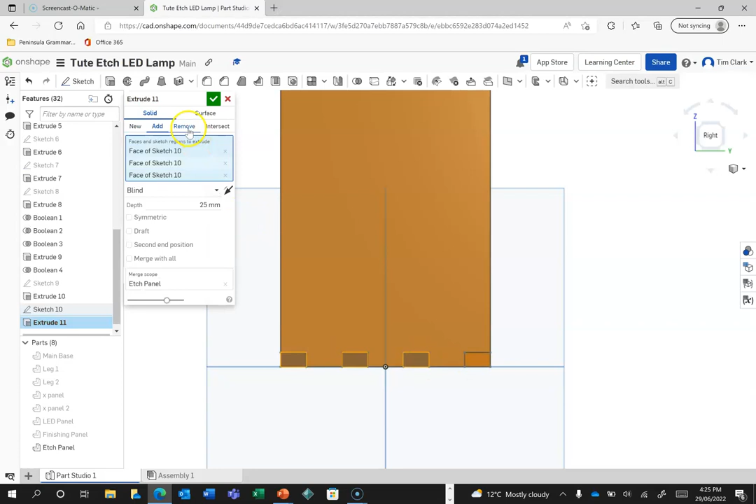I'm now going to turn the main base and the etching panel on, and you should see that those stick into there like so. So now I need to do a boolean, and I'm going to do a subtract.

My target, or my tool, is the etching panel, and my two targets are the top and the bottom panels. Press tick. So you should have the finishing panel and main base in there. Press tick. Now if I turn my etch panel off, you can see that it lines up.

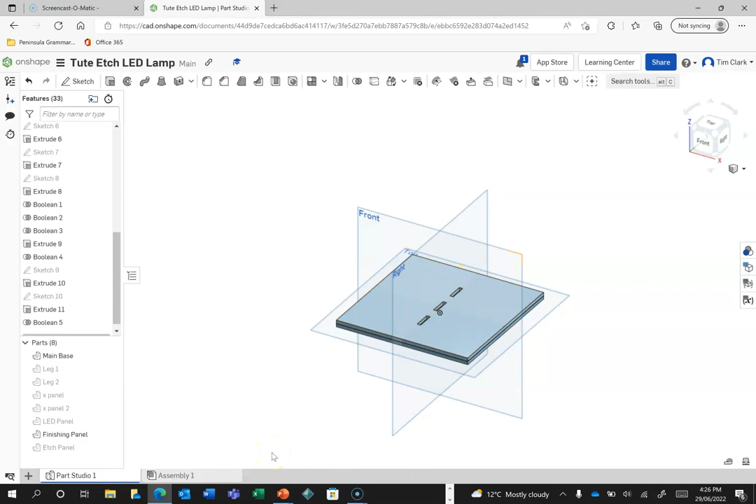So in order to get that top panel on nicely, all you need to do is line those holes up, stick it in there, wait for the glue to dry, and then you can take that panel in and out as you need to. So now we've got our etching panel and all of our other panels in place.

Before we do anything else, we're going to put our LED holes in place. See there, we have something happening.

So we're going to create a sketch. The sketch is going to be on this sketch panel. But before we do that, we're going to turn off the LED panel, and we're going to draw circles.

The circles are going to be on this line, like so. We'll draw them big for the time being. That circle there is just going to be locked on the middle, so we don't have to worry about that. We'll draw it big, make sure we don't mess it up, and we'll draw another one here on that line. So they're all lined up in a line.

Okay, now we're going to draw construction lines on these two rectangles. We can't see those, so we're actually going to do this special thing here, which is called this one here.

Sorry, again - project. I'm going to project this line here, and this line here, and this line here, and this line here. Project this line here, and this line here.

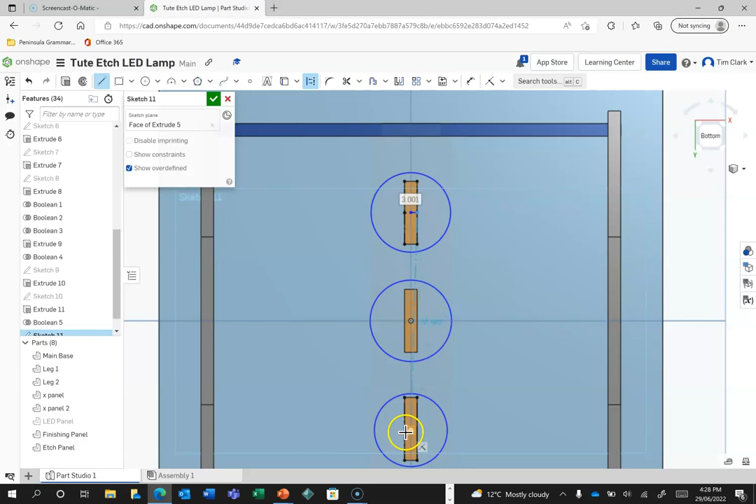And you notice that they're construction lines. That's always good. So now I'm going to draw in an extra construction line from the midpoint of that line to the midpoint of this line, and the midpoint of this line to the midpoint of this line, like so. It's a bit complicated, but that's what it is.

And now I'm going to make this one the midpoint of this circle onto this line, and I'm going to make the midpoint of that circle onto that line.

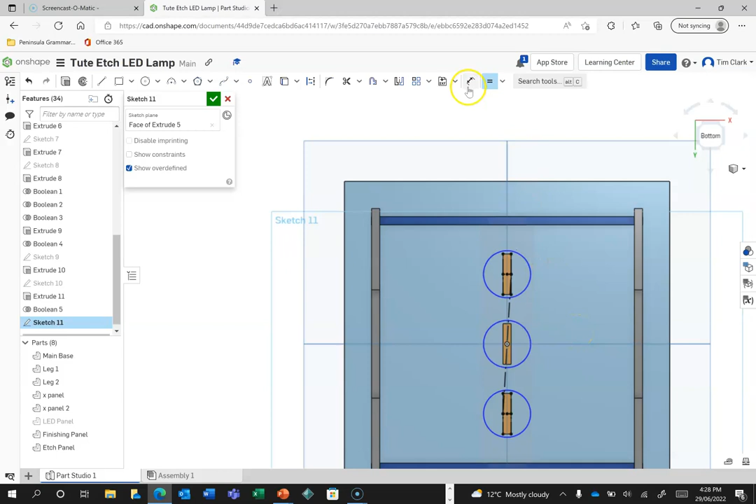Now I can actually sit there and use the equal sign to make each circle equal. And because each LED is a 5mm LED, just to be really precise, I'm going to set that to be 4.95, which means that the LED will sit in there a little bit nicer, like so. Now I'm going to press tick, and now I'm going to extrude the circle.

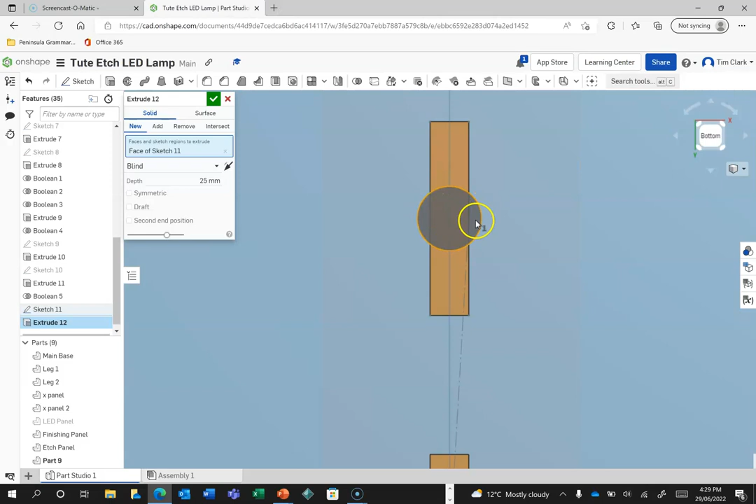Now if you can't get the full circle because this is not selected and this is not selected, you have to select three things. I'm going to zoom back in here, and I'm going to select this circle, and this circle, and hit remove, and merge scope with the LED panel, like so, and press tick. So that's gone through. Now I've got my holes for my LEDs.

That's the etch panel all set up. If you want to change the shape of your etch panel, now is the time to do it. I wouldn't go much bigger than that in any direction really. So if you want to make it like a funny shape or a fancy shape, you want to make it smaller than that if possible. Maybe a bit bigger here and there, but I wouldn't go too far.

The final step, step 9, is we're going to create a provision for batteries and a switch. We're going to be using AAA batteries and a very tiny, the smallest little switch that I could get access to, sticking out of maybe the back of the legs, able to be turned on and off, running on 2 AAA batteries. This lamp should basically run for about 4 or 5 days on 2 AAA batteries, but that's what we're going to be aiming to do, to power it via AAA batteries.

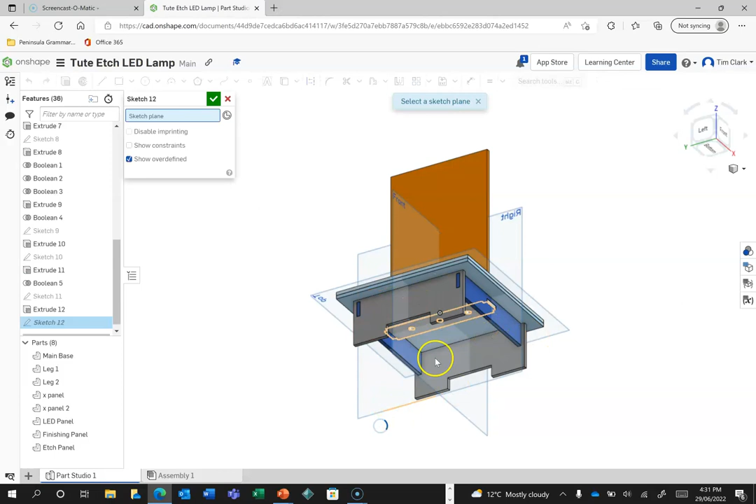Okay, we're almost there. The final thing is to actually put a switch in, and the switch can either go in the back or the front, but it's going to go through one of the legs of the lamp. So let's do the switch hole. We create a sketch on there, and the switch hole is going to be on that sketch, and it's just going to be a circle. I'm going to basically use the middle line as my drawing for my circle, so line it up with the middle line. Oh, the sketch plane's not selected. There you go, choose that.

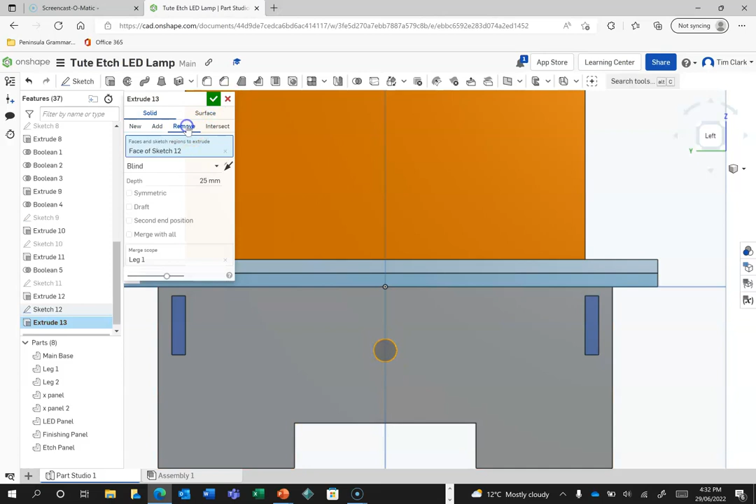Face it, extrude. Now I'm going to use the circle. Just line it up on the midline like so, and I'm going to zoom in, and set the dimension of that point there to that point there. Maybe 14, and the dimension of this one here is 4.95. That should be good. I'm going to press tick, press extrude, click the circle, click on remove and press tick. I've now got a little hole there for that particular switch.

I'm now going to run the battery in there, so I'm going to put the battery case in between here and here. I'm going to create a sketch on this base of this one here. I'm going to draw a line, which is going to be a construction line from that midpoint there to that midpoint there. Pretty close, that'll do.

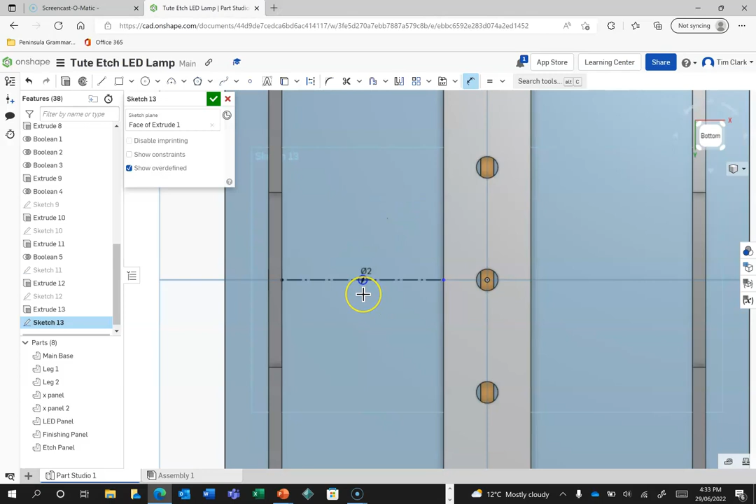And then I'm going to press on the circle tool. I'm going to make sure it's not construction now. On the midpoint of that, I'm going to draw a tiny circle. It's a big circle at the moment, but it's going to be a tiny circle. We'll make it 2 mil, which is really small. I'm going to zoom up, press tick, extrude that circle, press remove. There's a little hole in the battery case, or the battery clip, and that battery clip is going to just screw in there, and a bit of hot glue will hold it in place nicely.

So I've now got my lamp all done and dusted. So it's now time for us to come into our conclusion and think about what we're going to do to make this our own.

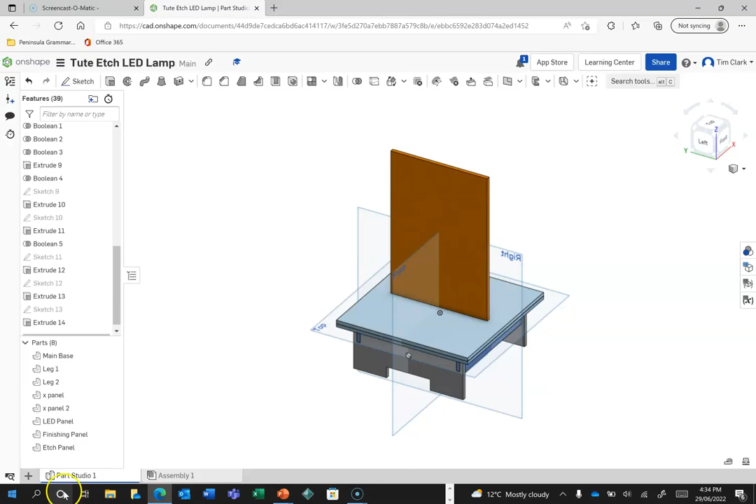That's as far as I'm going to take you with this design. It's now up to you to make any changes you wish. You can do things like rounding corners. You can change the shape of the etch panel. Just don't make it too big however, ask your teacher as to how big it should be maximum, otherwise the light won't shine through very well.